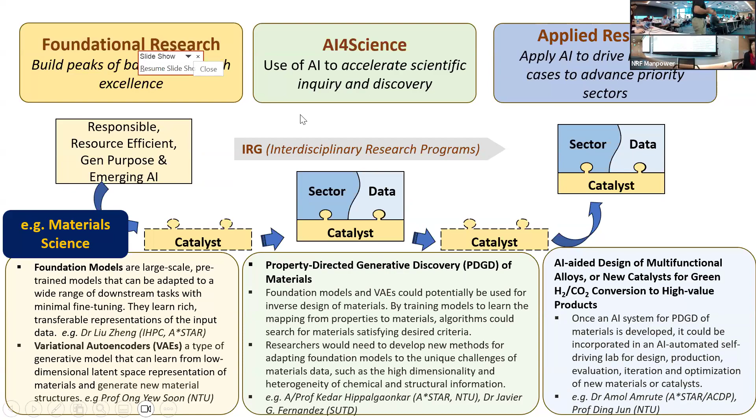Thank you, boss. Thanks, Kedar. It's really a pleasure to welcome all of you here. I'm Saif Khan, I'm at NUS Chemical Engineering, and I'm very happy to see so many friends over here.

We have an amazing program of talks. Let's go to the slide, and in the next 10 minutes I'll orient you, in addition to what Kedar has done, and talk about what we seek to achieve in today's workshop, and contextualize it in the framework of the other workshops happening. We'll discuss some motivations and drivers.

So first of all, who's here? We have an amazing collection of people - folks from academia, public bodies, and industry, represented by small and medium enterprises.

We have a collection of expertise in chemical and biological manufacturing that spans end to end - everything you may need, right from synthetic chemistry, biochemistry, biotechnology, through to reactor and process systems engineering, and all the flavors of AI, machine learning, data science, and optimization.

So we do have a competitive advantage in general - Kedar spoke about study trips abroad. In Singapore itself, in just a small land area, we have this amazing connectivity and concentration of basic science, translational research, industry and academic R&D, and policy making. Let's make use of that competitive advantage.

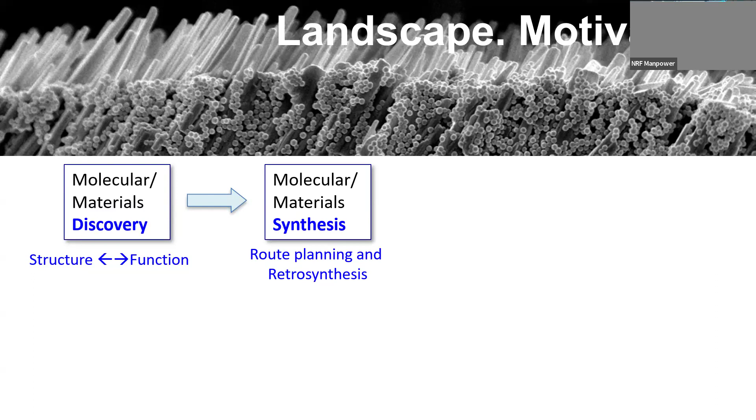This domain has been significantly accelerated by the availability of AI and ML methods. Currently, let's take organic chemical synthesis. Very large data sets already exist and are being mined in very different ways to discover patterns for reactivity, etc. There is a big development of high-throughput experimentation tools that generate the data that is needed to complement the AI methods that are being used.

This is not the focus of this workshop. In fact, next tab, because this is actually a workshop that will be complementary to the workshop we're having today. And this workshop, I encourage everybody here to attend, is the AI for Materials Science and Chemistry workshop on 8th May, which Kedar will be leading along with Beatrice and a few other folks. It's an amazing workshop that establishes the role of AI in the discovery and the synthesis side.

Now, for us in this workshop, next tab, please, we're talking about process technology. Once you have discovered new molecules, new materials, our job here is to understand what science we need to enable the scalable process technologies that will ultimately manufacture those new materials, new molecules, new therapies, etc. And often in manufacturing, we are performing multi-objective constrained optimization problems. Our process systems need to be scalable, sustainable, economical, robust.

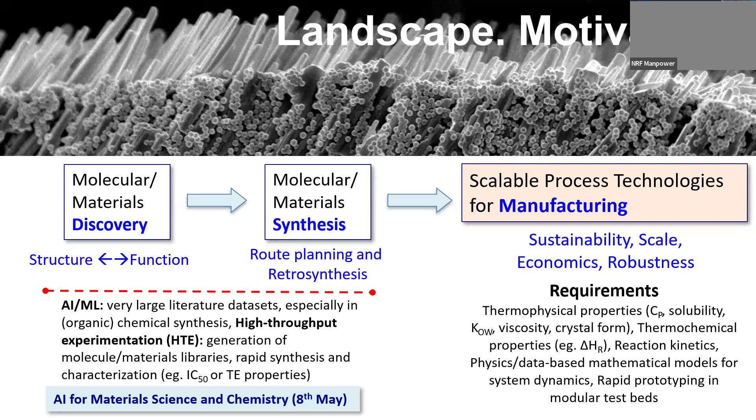And the kind of requirements that we face when we design processes for manufacturing are complementary. We need to know a lot more things: thermophysical properties, thermochemical properties, kinetics, transport properties, and so on, and string them together into process unit operations that ultimately do the jobs. You can do it in radically new ways, or you can use existing technologies. But this is the domain that we'll be playing with today. The questions we'll be addressing are the grand challenges in this particular domain of scalable process technologies. Next slide, please.

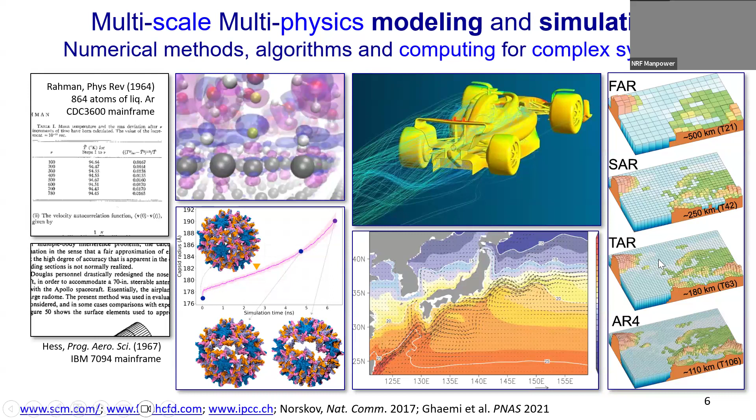We come to the AI revolution, right? And, let's say, no worries. And this is where we're playing today, right? The era of machine learning. Now, essentially, it builds on the era of computing, and the whole theme is accelerating discovery, scientific computation, and design. These are all things that we as manufacturing folk need to leverage, right?

So just a couple of examples of the things that AI is doing, and you'll hear a lot more from our speakers. But really what we've started doing is our ability to leverage AI with big data has revolutionized the way we, for example, infer dynamical laws from data. And we can actually infer or distill physical understanding from data. That's now a very big field in machine learning and AI.

We can use AI to dramatically boost computational simulation, such as computational fluid dynamics. And lastly, we have this amazing ability to now conduct generative design, which is bespoke design of process systems in ways that we could not imagine. So these are just some of the things that are coming together. Our ability to distill patterns and understand laws of dynamical systems, our ability to boost computation itself, leveraged by AI, and then also to be able to do generative design.

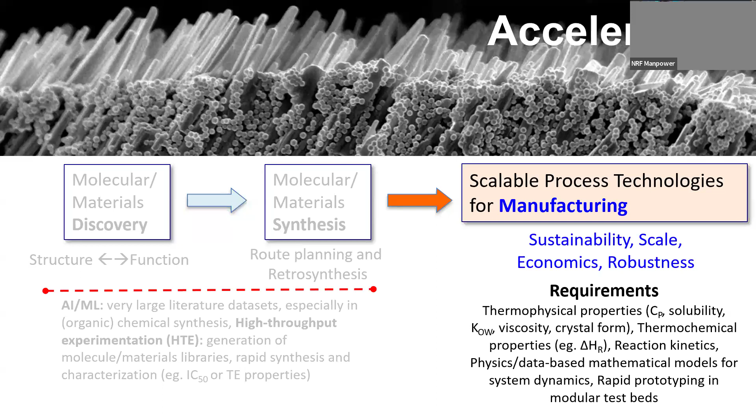Next slide. So that's the theme, right? At least one of the big themes is AI enables acceleration. And maybe we can explore today the acceleration in the context of scalable process technologies. What can we leverage AI to be able to do in fundamentally different ways for the manufacturing context? I have 3 examples. Next slide.

Some of this acceleration is things that we are actually doing today, really thinking about, at least at the lab scale or at the pilot scale, how do we accelerate process development? How do we generate a lot of data, use that data to conduct optimization, for example, finding optimal conditions for chemistry, but at the same time, with that data, learning or inferring knowledge from that data by way of reaction mechanisms, by way of reactive landscapes, etc.

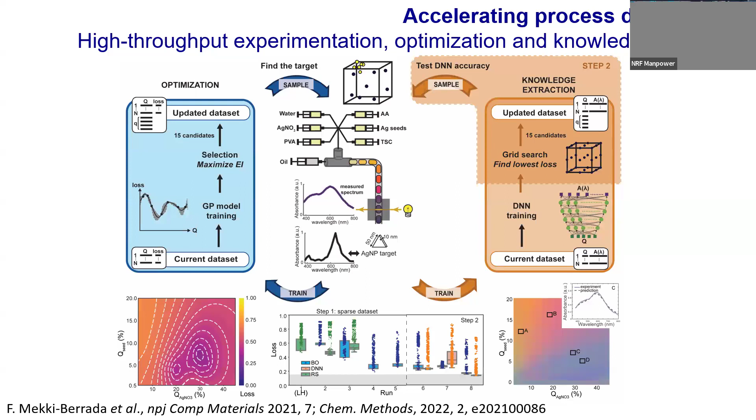Next slide. We're doing things like multi-objective optimization to be able to establish viable process routes towards new molecules or materials. This is ongoing efforts. Actually, these are some examples that Kedar, myself, and a bunch of other amazing interdisciplinary talented people are doing in Singapore today. Next slide, please.

And I think for us as a manufacturing audience, right, I think we can meditate on AI-enabled accelerated design of new process systems. So that's one thing, right? If we are going to discover new molecules and materials, can we really think about revolutionary ways in which we can use AI for science to accelerate the development of new process systems?

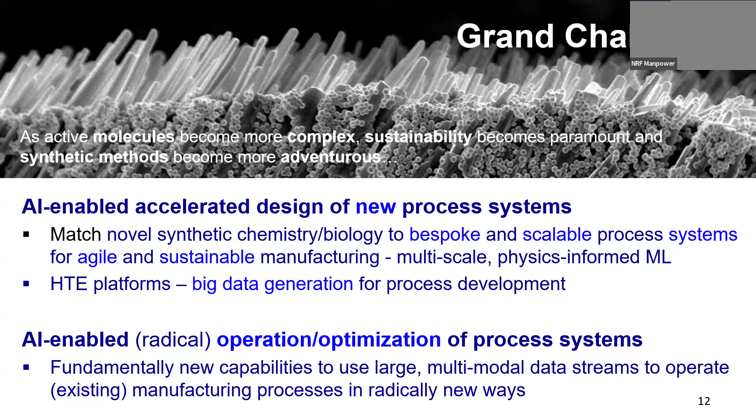We have fundamentally new capabilities to be able to use multimodal data streams to operate existing manufacturing processes in radically new ways. These are just some of my thoughts. You'll hear many thoughts from the roster of speakers that are coming. And we'll talk about the next slide, which is the brainstorming session after we've had our speakers talk.

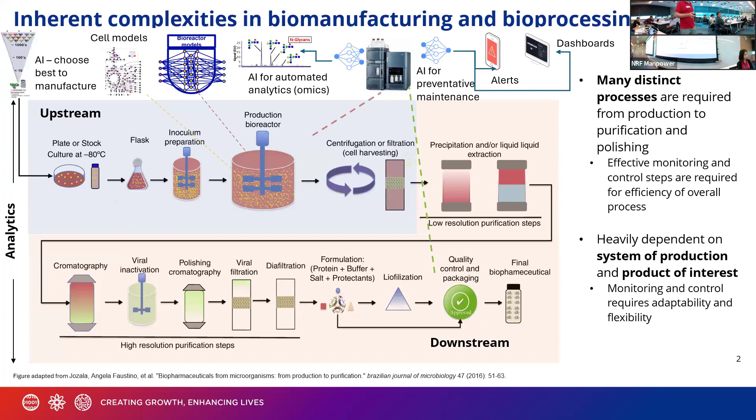Other models include bioreactor-based models, cell-based models. So for example, inside the bioreactor, we often have the cells that express the therapeutic. So how can we do metabolic modeling using these cell-based models? And even before we go into the manufacturing process, we can also use AI to choose what the best therapeutic is. So from a pool of candidates, choose the best one to bring to manufacturing. And each arrow that we see here, there's lots of data being churned out. And we have to capitalize on that data using AI.

In industry, they've already started to adopt AI. So these are two examples where GSK, Siemens, and Atos use a digital twin in their vaccine processes. And what they did is they hook the digital twin into the real world processes, and the sensors in the processes send information back to the digital twin, and then the digital twin simulates how to control for a healthy process. Another example is Sanofi and Dassault Systèmes also use a different type of digital twin where they can optimize the three-dimensional facility. So optimize the facility for efficient production.

Two years ago, we published a paper on how to harness machine learning to do better quality by design. We described that in a bioprocess, we can extract critical process parameters, like from the cell culture media—there's a lot of parameters in there, like amino acids, vitamins, metabolites. We can also use physicochemical parameters as input into a machine learning algorithm in an upstream bioprocess to predict critical quality attributes like cell growth, productivity, glycosylation level, and aggregation.

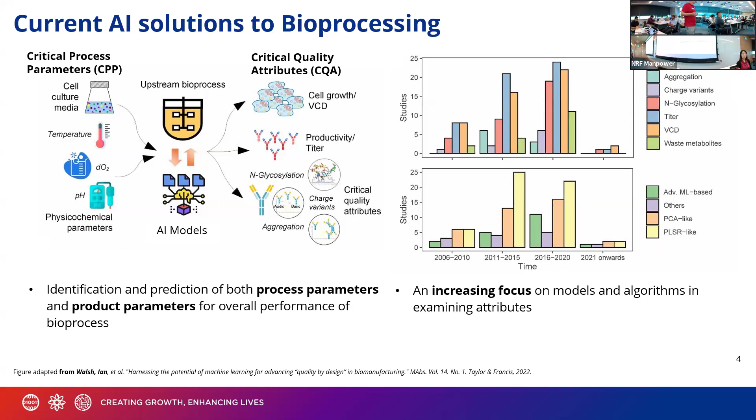So let me go through some examples of what we did over at BTI.

So let me go through some examples of software that we use to automate quality checks in the process.

This is an example of glycosylation on antibodies. This is very important for the function of antibodies because it's a regulatory requirement to screen for these glycans, since certain epitopes on the glycans can cause anaphylaxis in patients. Previously we've done this using a manual approach that can take days. If you have hundreds of samples, multiply that by days, and you get a very time-consuming, costly quality check. So we took the data and transformed it. Compared to the conventional approach, where it's very difficult to characterize isomeric glycans, we transformed the data using an extra layer of ion mobility, and using that transformation we were able to separate the isomers and do pattern matching, where we could determine glycosylation in seconds or hours compared to days.

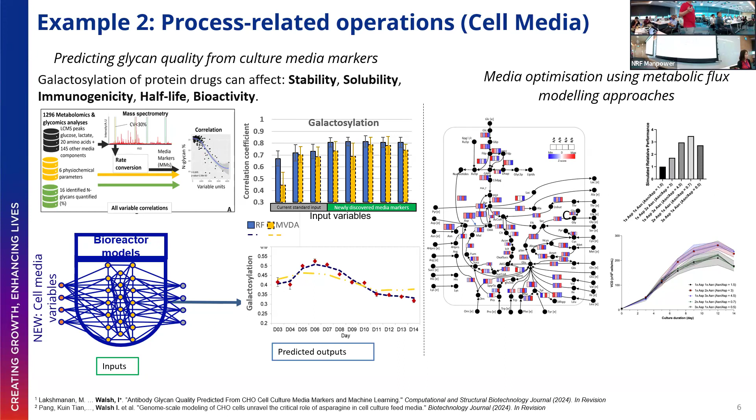So how can we use these machine learning and mechanistic models in an actual media development process?

Well, first, it's probably best to describe the traditional design of experiments approach, where a series of bioreactors are used, each having a predefined media. We also characterize the output variable, the product yield. In the DOE, we can find the best set of media variables that correspond to the best product yield. Then we have to take samples from the bioreactors and show that the quality attributes are within a desirable range. If they're not, we have to repeat a cycle of DOE, and this can go up to 3 rounds and take almost 5 months, which is very costly.

So what we propose is to replace the DOE with our machine learning and mechanistic model, simply taking input from the mass spectrometer, such as basic metabolites, amino acids, and vitamins.

Changes in those can be placed as input into the algorithms, which completely removes the need for a cycle of costly experiments, and we can do in silico experiments instead. So we can use the algorithms to run hundreds of thousands of dry lab experiments that correspond to the best simulated CQAs, which correspond to the recommended media formulation. We bring that to a bigger scale bioreactor, and then see if, in our offline measurements, the CQAs are within the desired range, and then continue to scale further. So this part greatly speeds up the process of media optimization.

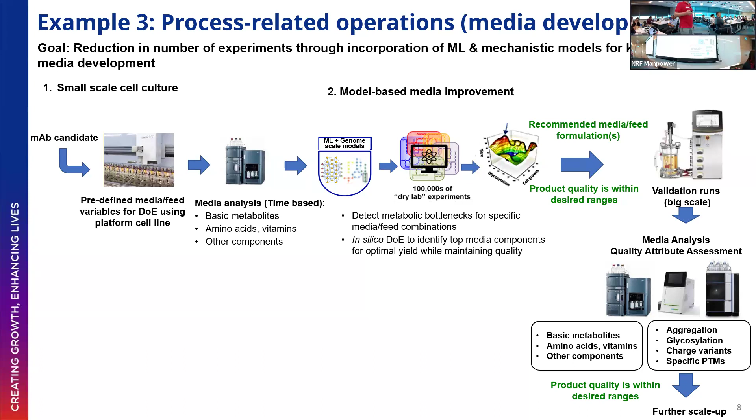So what are the open challenges in AI biomanufacturing? Well, first of all, we believe there's a lack of large, high-quality data sets out there. All the multinational companies do have these high-quality large data sets, but they keep them private. So perhaps in Singapore, what we can do is have the IHLs and RIs come together to create a large, high-quality biomanufacturing data set that non-commercial and academic researchers can use.

The second challenge is the integration of these data types. At BTI, for example, we do have good integration of proteomics, transcriptomics, glycomics, and metabolomics for biologics. But there's much more work to be done in new modality areas like cell-based therapies and mRNA. So that's an open problem, to develop these integrated omics data sets.

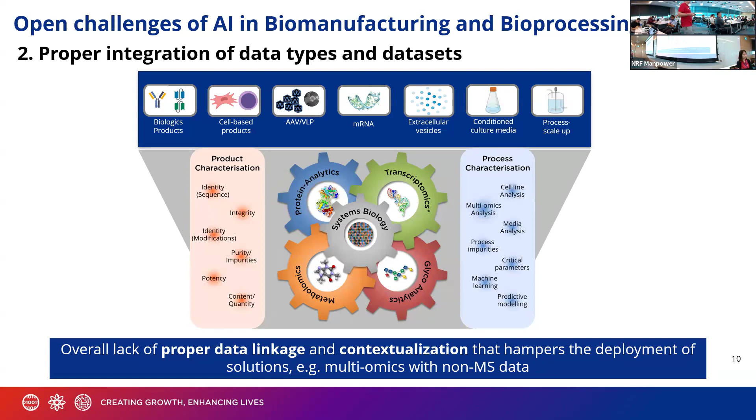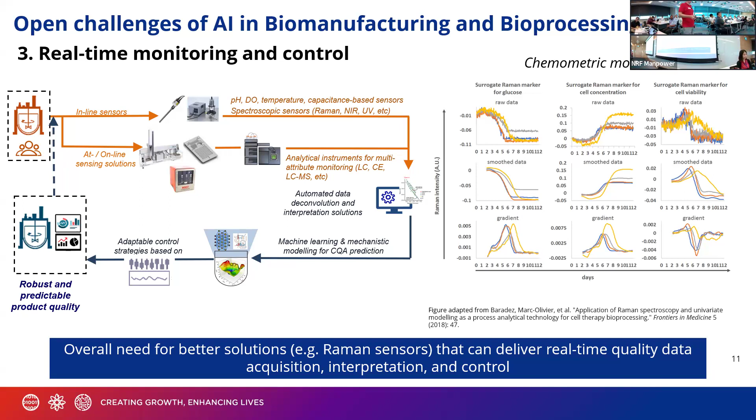And the holy grail of biomanufacturing is to develop a real-time monitoring and control loop, where from the bioreactor we extract various data from inline, at-line sensors, spectroscopy sensors like Raman, your usual mass spectrometry data. We use all this data, pre-process it, place it into a hybrid model which has mechanistic and machine learning components, and use it to output how to control the bioreactor for robust and predictable product quality.

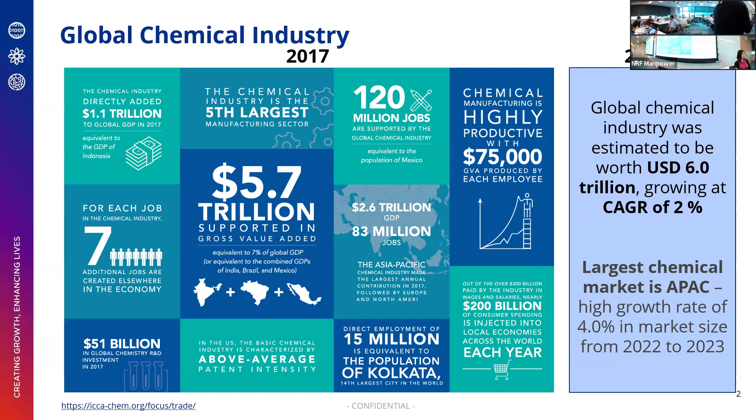I think unlike biologics, which is really more complex, on the chemical side of the house we've been doing this for many years, and the world and the chemical industry live in the benefits of the advancements in the chemical industry over the last century. This is really the landscape of the global chemical industry in 2017, and actually in 2023, not much different. It's still a very important segment of global GDP, and of course the APAC region is growing as well. So what is the motivation behind what you call transformation in the E&C sector? I classify it into three key trends in the chemical industry that are really happening and urging this transformation.

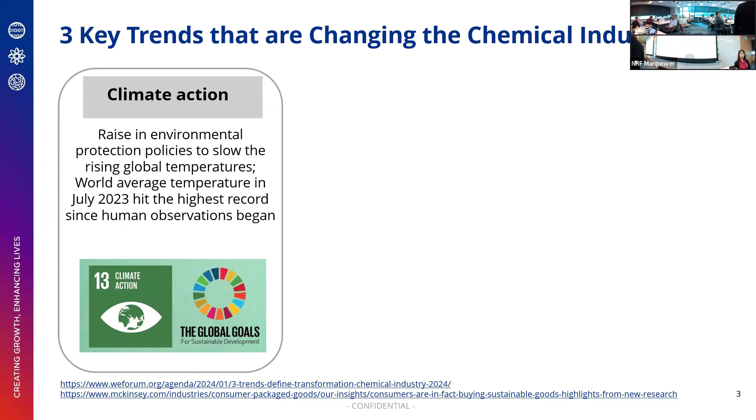One is of course the climate crisis, under the rising notion that a lot of our actions are actually causing climate change. There's also a lot of things worrying in the chemical industries and companies, and that's really the geopolitical shift and decarbonization imperatives around. These dual forces at play are causing changes and responses from customers. The last shift is also all of us demanding more and more sustainable products that you want to use, to play your part to save the environment for our next future generations. So all these are, I think, the fundamental forces at play for why there's a need to further look into chemical industry and its transformation.

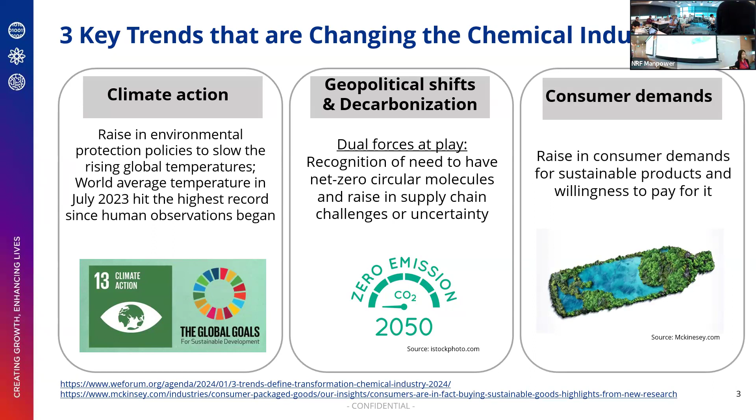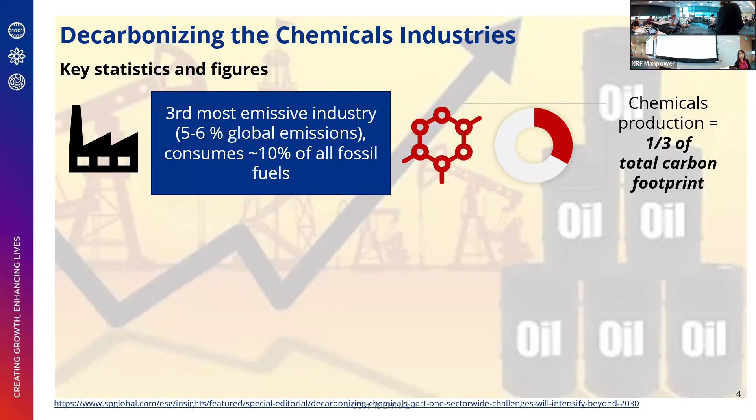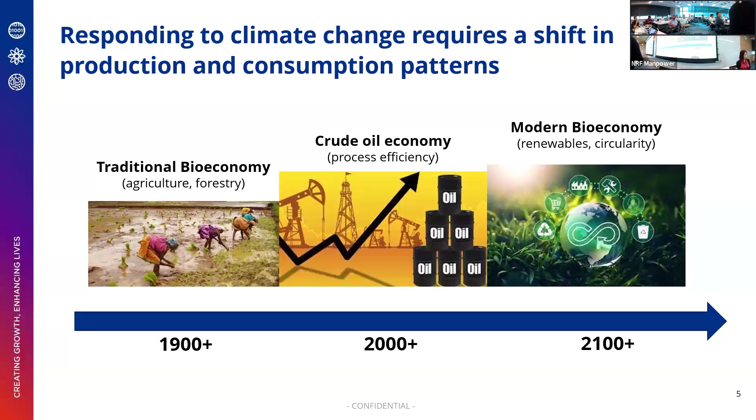So where we are today, of course, is we are beneficiaries of the crude oil economy, and in the future, perhaps it's a combination of new industries embracing something like what's called the modern bioeconomy. So in our lab in ISCE2, we look into the nexus of chemistry and biotechnology innovations, and synergize it with much modern digital tools, really to target some of the chemical problems that we face today in the E&C sectors, in the area of chemicals and fuels.

So we leverage not just our chemistry knowledge, but also our A*STAR chain connections, for example, and really look into tools, automation, and putting together this multidisciplinary team, not just within ISCE2, but also leveraging a lot of expertise across different parts, different institutes of A*STAR, the IHPC, BII, IMCB, CFP, etc.

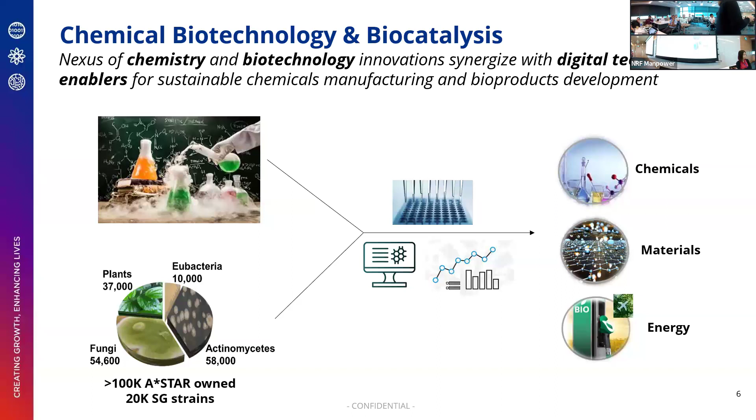Going forward, in the area of synthetic biology and chemical biotechnology, maybe I'll just give a definition. What are really the differences and also the relation to chemicals? Synthetic biology is definitely a much broader definition. It's a multidisciplinary field that in essence involves engineering of organisms for a particular function, ideally a new function, a function of choice. And with that, the organisms can really include biological parts, enzymes, systems, devices. So it's multi-level—it's almost like the biologics case where you take a cell, you engineer it, you put in engineering principles, and create a new function.

It's a very broad range and very preliminary. It has been shown to have impact in multiple industries, beyond chemical industries, of course. But in chemical biotechnology, I think what we really want to focus on is really the application of synthetic biology for chemical synthesis only. It's also the engineering of enzymes and cells and microbes, but really for chemical industries.

So with this, I want to highlight a recent quote by a co-founder of DeepMind, that AI is probably helping this area to come of age. The quote basically says that the world will soon see a new wave defined by two key technologies: what we believe is AI, and also the advancement in the ability to control organisms and really impart new abilities and new functions.

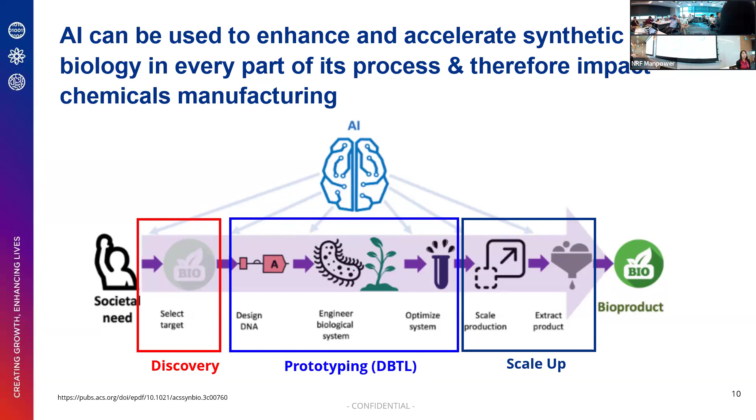So in the next few slides, I'm just going to give a few examples of how people have been trying to advance this area, both locally and internationally. A lot of folks in the world have been looking into how we can develop models to accelerate prototyping - how can I make it faster? How can I do things that make it faster to really get to the process that I want, to get to the system that I want?

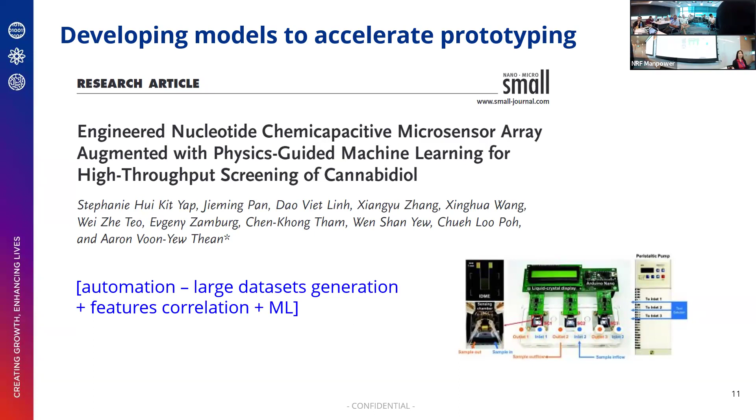So this is a local example from NUS. It's really about making use of automation, generating large data sets, creating feature correlations, and machine learning approaches. So this is one type of approach.

In the biocatalyst development phase, this is an example from Professor Arnold's lab. It's also about automation generating curated huge data sets, and then applying a multimodal type of approach to really understand this and ask ourselves, how can we do this better in the future?

Our contribution in this space is in the enzyme engineering space as well. I'll just use one slide to summarize what we have been doing. We have been building a high throughput experimentation platform, leveraging our expertise across different groups in A*STAR as well as other collaborators to look into not just computational modeling, but combinatorial approaches, multimodal predictive work - which we are in the midst of trying to publish - and also applying generative AI in the development of some enzymes recently.

So that's a lot of work that's ongoing, merging the idea of high throughput curated data generation with models to accelerate some of the developments. This is just one example of how we took the enzyme, took the information we have from the natural product library through a mining process, applying automation to generate large data sets, and then AI models to discover and engineer new plastics.

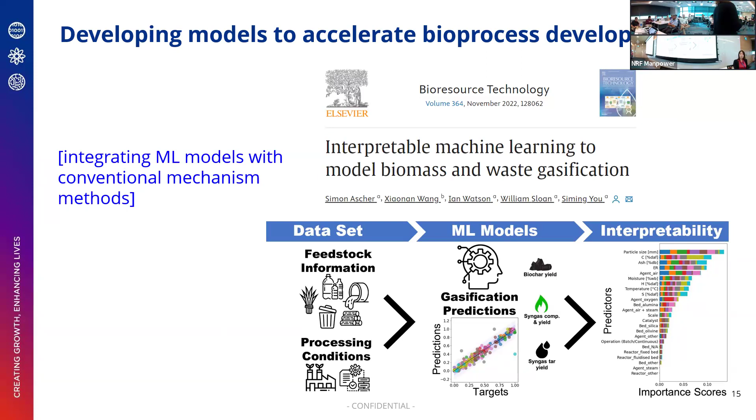People talk about the need to develop integrated models. In terms of discrete models, I think more has been done - if you take one type of information, one type of model, one type of parameter, it's a lot easier, and some of that has been seen in the literature. It's a lot harder when you need to integrate everything. That is kind of different and quite hard to understand, as one system may not talk to the other as well.

This is really an example of how you can integrate the advancements of biocatalysis to make precise chemistry of choice, harnessing insights that nature does very well, and then couple it with key advances and critical chemistry that has been developed by chemists over the decade. Today I think in biology is actually irreplaceable as well. There are aspects where biology and chemistry can complement.

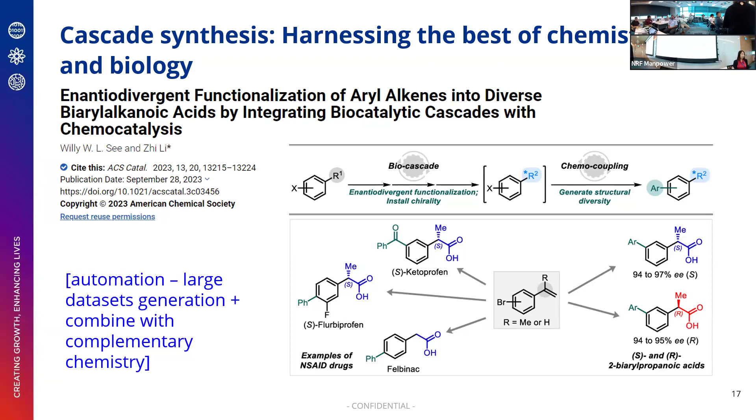This is also a highlight of an example. In this case, how do you find the best way forward? Which is the best way forward? Finding the best path forward, I think this is an example of recent work at MIT, and it's really to merge enzymatic and synthetic chemistry with computational planning.

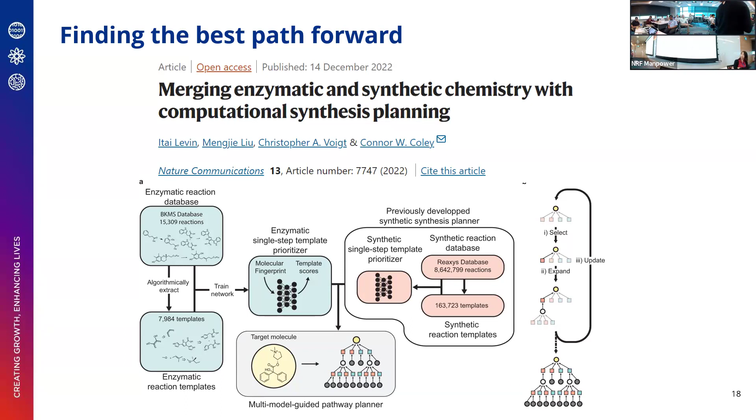But is there a particular point when you say actually you should just do this with a chemical approach, or you should just do that with an enzymatic approach? I think we are still trying to find the best path forward. So our contribution in this area is for you to actually find the best path forward. One of the best ways is actually to generate a lot of data.

So I just wanted to end off by saying that it's definitely possible to use AI to enhance every step of the way, all the way to help manufacturing and finding the best processes, finding the best route forward. For the advancement definitely needed, I think we need to integrate across the developmental chain. I think that's hard, that's really the challenge going forward. I think AI can play a big role here, and that's really a big potential going forward. Thank you.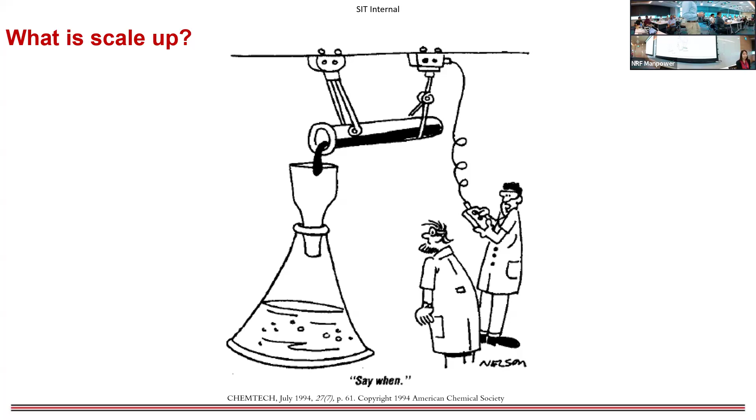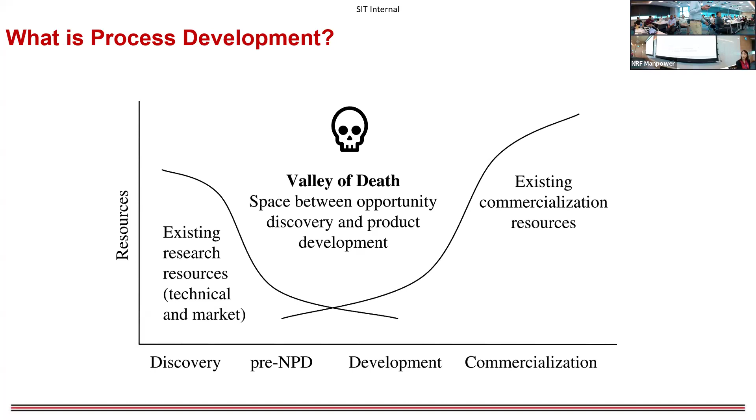So what is process development? From an innovation point of view, it's the phase in between the discovery and the commercialization route. It's where you test your hypothesis at a large enough scale, and when most of your ideas die. That's why it's also called the valley of death. It's a tough place to be playing, I have to say, but it can also be exciting.

From a technical point of view, if we look at complex molecules, the making of pharmaceuticals, for instance, we can loosely think about the R&D as three distinct phases: the discovery phase, the manufacturing phase, and the process development, which is typically looking at making kilograms, a couple of kilograms of products at the pilot scale to develop a proof of concept.

And what goes in people's heads at that phase? Well, you take something from the discovery, you look at, can I use it as it is? Most likely not. Then you need to screen for alternatives. You need to see whether there are examples of being demonstrated at a sensible scale. You can see whether the experiments are reproducible to a level you're comfortable with, whether there is existing know-how in-house to actually translate and move it forwards.

We need to consider safety. Safety is paramount, okay? And we need to have a business case. No money, no talk, okay? And this is under a lot of pressure. In this space, especially making specialty chemicals or pharmaceuticals, every day that you can save, the day that you can monetize on your technology, that you can extend your patent, there's a lot of money at stake.

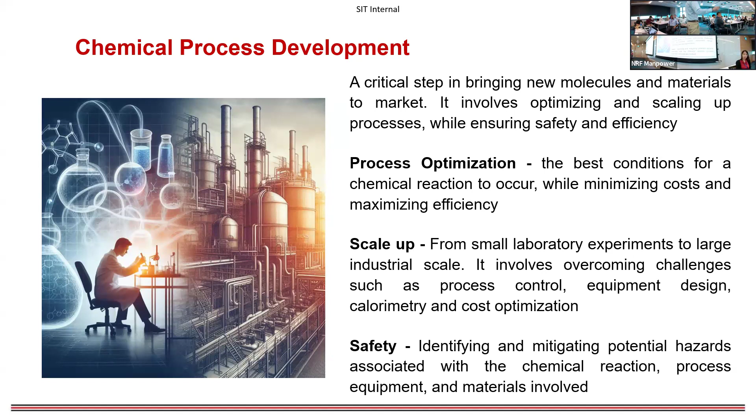All right. So, if I were to summarize a few points, chemical process development looks at bringing new molecules to market in a systematic way, and it looks at process optimization, best conditions for chemical reactions, maximizing efficiency, costs. We also look at ways to bring things from round bottom flask to pilot scale to industrial scale, looking at process control, equipment design, calorimetry. There are a lot of parameters involved. And of course, safety, identifying and mitigating potential hazards that are associated with charging, discharging, combining, storing chemicals, and so on.

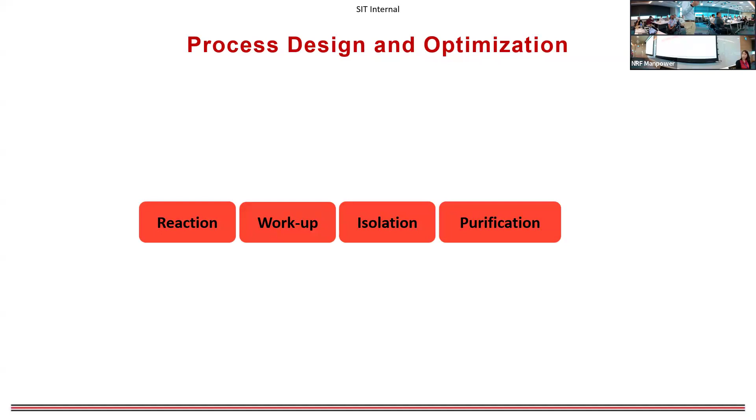So we usually focus on 4 things as scientists: reaction, workup, isolation, purification. But the process is really more than that. We have a lot of things that need to be considered, and these all contribute to our final decision on what process we should have and should consider.

We also need to be aware that we need to make a lot of steps on the journey going from lab to commercial scale. And at each stage gate, right? Can you imagine this in the process development process? We need to make a decision to go to the next step, go or no go, based on the available information that we have at that point in time. So we can see that at the beginning we have very limited information, and we need to have a judgment call to move to the next step.

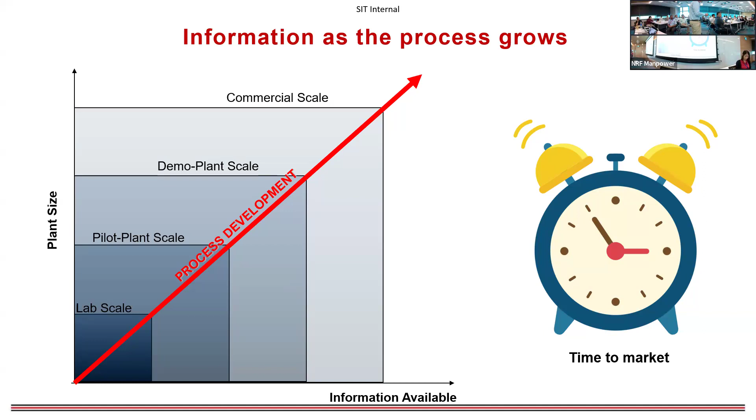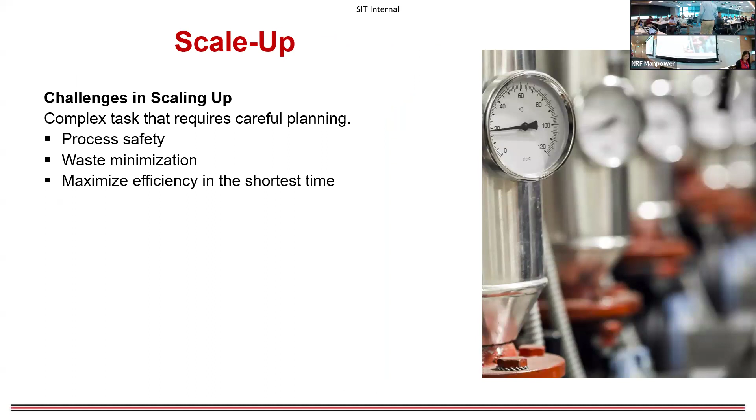At pilot scale, we have a bit more information, but again, we don't have a clear picture. You see where I'm going, right? You need to be quick getting to market. You don't have a full picture. You need to commit to some decision and move on. And that's why it's critical for us to understand things. Yes, we want to maximize cost efficiency, designing sustainable processes, but we need to make sure that stuff is going to be safe when we do it at sensible scale.

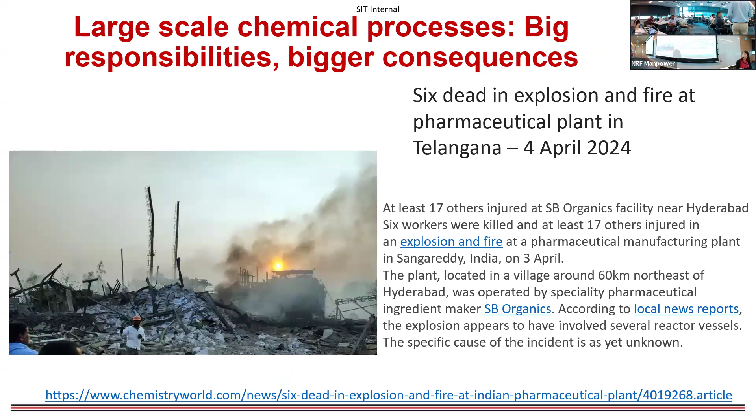Okay, so let's get on a positive note, and let's talk about some of the challenges and opportunities in this space leveraging AI. I just selected a few in the interest of time, looking at ways to make sustainable chemical processes, looking at the complex reaction outcome, filling the data and information gap, because we need to make decisions. And ideally, this is more aspirational, we do scale up in minutes rather than months.

So in terms of making processes more sustainable, there are a lot of components that we can look at. We can look at minimizing waste, looking at possible reactions that can trigger accidents, that can lead to toxicity, failure to comply with authorities, and so on. Efficient use of resources. And because sustainability is a key driver nowadays for a lot of companies in this space, how do we use life cycle thinking in a way that's easy to use, that is quick to use, and maybe helps to get better decisions in terms of supply chain?

If we look at the pharmaceutical industry, the majority of the emissions are actually scope 3, which are outside the factory floor. They're based on decisions that you make based on your suppliers. Of course, technically, we can look at optimizing reaction conditions, developing high throughput processes, leveraging process intensification, adopting novel technology to open up new reaction space, and ideally trying to go for low energy use technologies.

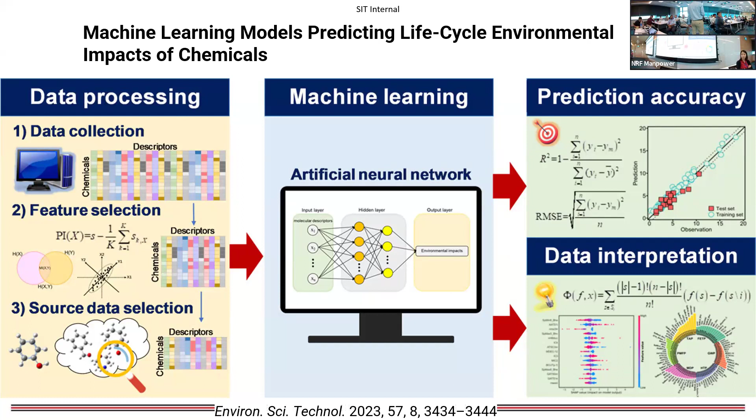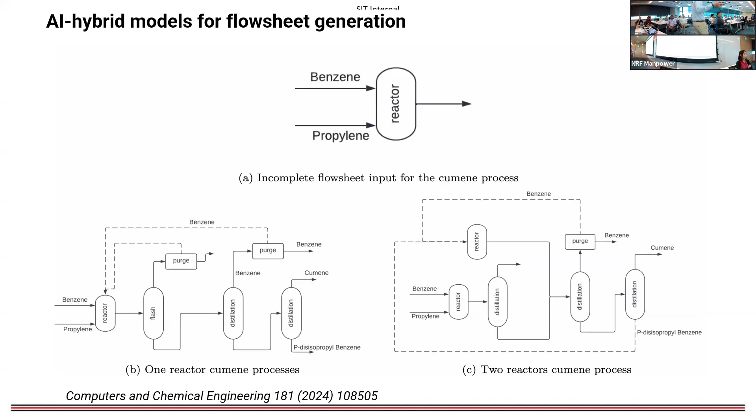Or, for instance, you want to develop a new chemical process, you only have limited information, and you can use artificial intelligence hybrid models to generate flow sheets, so you can get a first feel on how the process should look. Sure, you should always show this to your friends in the engineering department, who might say this is not actually very good, or maybe it's missing a pump here and there. But you get the idea. You can input text or simpler information closer to the domain of chemists, biologists, and so on, and get a first cut of what the process might look like.

And some that are even bolder are trying to combine the two concepts, where you can put molecular structure and stoichiometry, generate the flow sheets for the process, and then using a different type of neural network, get the environmental impacts as well. So there's a lot of excitement in the various aspects of chemical process development, whether environmental, technical, engineering, and so on.

So where could AI help us in areas that are maybe underserved at the moment? It's a long list, and it's not by any means exhaustive. There are things we mentioned this morning about physicochemical property predictions. Yes, there are certain tools. They are scattered, usually behind a paywall, and usually require quite a lot of data behind them to work. We want to do that with smaller data sets: just a few experiments and then get what you want. Accurate calorimetric estimates from a molecular description or even a lab recipe would be fantastic. No need to spend $500,000 on a reaction calorimeter, though you'd probably still run the experiments anyway. Also heat transfer, mass transfer data, equipment characterization.

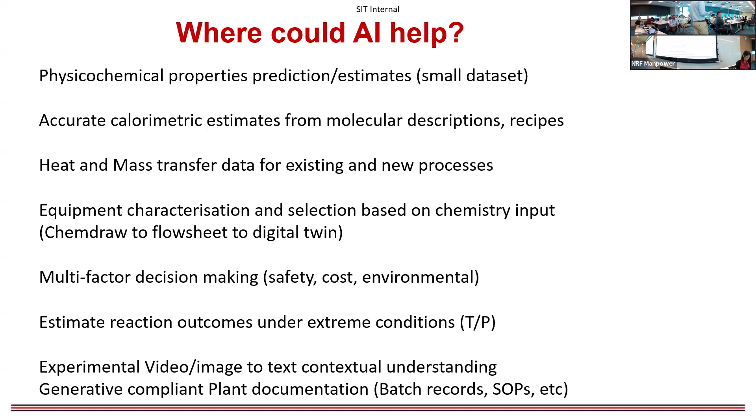Estimate the reaction outcome under extreme conditions. This is not trivial. You need to perform selected experiments to get enough information, and we'd do it without performing the experiments. Or using video or image to text for contextual understanding: take a picture of your running process, and the AI tells you what's going on. Generative compliant plant documentation. This is very tedious, but it's a necessary evil. In principle, we have the technology, so why don't we use it? Why don't we see it? Maybe not yet. So we need to be aware of the gap.

There are certain things that we are lacking. We don't have very good multiphasic data from experiments. We might have some scattered information, and very often we make a lot of assumptions, but getting actual good quality data from multiphasic experiments is difficult. Also, having high throughput experimentation infrastructure that does not just screen different compounds, which is useful for certain applications, but gets data that is important for scale dependency. So I run experiments at small scale, high throughput, and I record exactly the information that I need for the scale up.

Again, this is probably repeating what others say, but it means that is a common concern about getting accessible open source, ideally database platform with the relevant high quality information. At the moment, this is not so easily available.

Of course, it has to be important that we get a good interdisciplinary collaboration between key domains. Getting people that are experts in AI, and I mean experts that do that all day long, and get people that are highly focused in chemistry or chemical engineering or biologics and so on, and really trying to combine their expertise in ways like, look, this is my domain. I don't understand yours, but you do. Can we come up with something interesting?

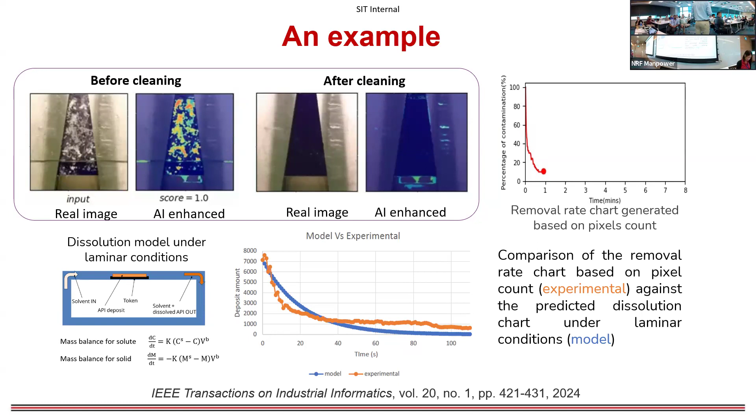I have to say, that was the first time trying this, right? It didn't do a bad job, okay? So this is just one example. There are many more out there. But it's just to stimulate perhaps the conversation later on.

Because I have a dream, okay? That I can actually take pictures using an app on my phone, like what we can do now with Copilot, with ChatGPT, Claude, you name it, right? And get all the relevant information that allows me to then convert quickly, in minutes, into a scalable process.

So I will conclude with this. I hope that we will have fruitful discussion in a moment. We have a lot of firepower in the local ecosystem, and we should be aware of that, right? So I hope that we can actually find ways to make a difference in this space. Thank you.

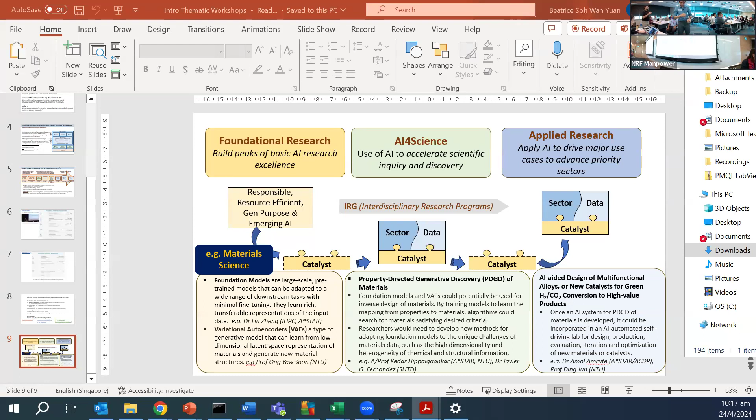Thank you, Valerio. So we've seen three talks, right, from the practitioners in biologics, in the intersection between chemistry and biology, as well as in chemistry. Now let's flip. The next three talks will be about the data side of things, the computation side of things, the AI side of things, right? Where we have people who deploy some of these state-of-the-art methods towards the chemical, materials, and manufacturing sciences.

So first, it's a pleasure to welcome Professor Wu from NUS, and he'll be talking about machine learning for process modeling, control, and diagnosis. So we'll flip the flavor of the session now more towards modeling, optimization, etc. So Zhe, the time is yours.

Yes. Thank you, Saif. So today I'd like to share some of our research and thoughts on the open issues for machine learning in process modeling, control, and diagnosis. So first of all, I'd like to briefly introduce my research interests. I focus on four things here. The first is AI in process modeling, optimization, and control. The second is AI in chemical process diagnosis and cybersecurity.

And the third is AI in broad areas of chemical engineering, including using AI techniques to accelerate material discovery in collaboration with our colleagues. And the last is computational modeling, like CFD simulation and Aspen simulation for the purpose of TEA and LCA analysis. So today I will mainly focus on the first two because they are highly relevant to our process model.

So first of all, I'd like to introduce what process systems engineering is. Process systems engineering is an interdisciplinary area which integrates modeling, data analytics, design, optimization, and control techniques to build a model for process operation. So basically, in my research, I focus on the framework of AI in chemical process control and optimization, including the theory, the methods, and also the practical challenges. We will discuss some details in the following slides.

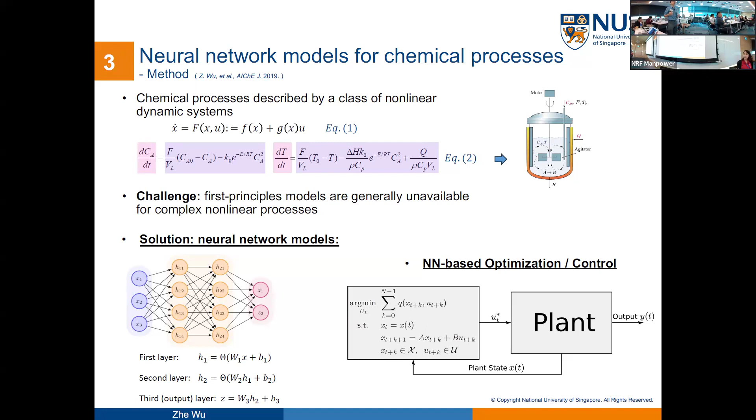So this is just a simple application of neural nets in process modeling. Next, we apply this simple neural net approach to many different processes, including chemical, pharmaceutical, and energy systems, and demonstrate their effectiveness. So in conclusion, we know this conventional neural network has its advantage if we have a large data set.

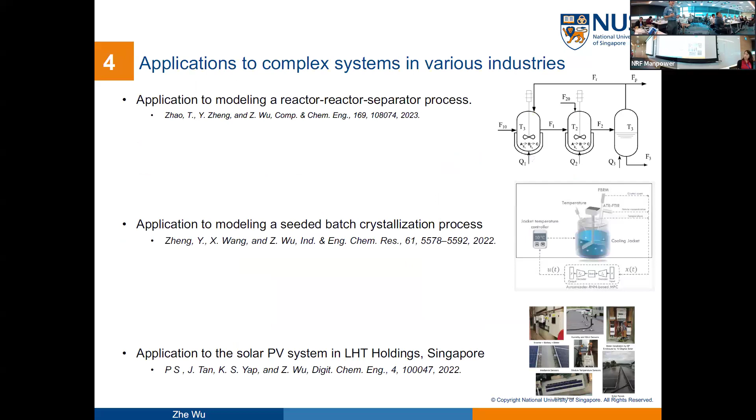But the question is, usually the machine learning model does not extrapolate well and requires a big data set, and such a big data set may not be available in practice. So how do we tackle this challenge? One of the possible solutions here is to integrate data with domain knowledge, because as chemical engineers, we always know some type of a priori process knowledge or domain knowledge.

A very typical way to do physics-informed machine learning is to incorporate the first principle model, or sometimes it's called governing equations, into the training of machine learning. For example, here we can introduce another physics-informed loss term, which is basically the left-hand side of your ordinary differential equations minus the right-hand side of the ordinary differential equations. By introducing this physics-informed loss, we can significantly reduce the amount of data needed for training such a neural network.

We also apply this physics-informed machine learning to the previously introduced CSTR example, and we demonstrate that by introducing this physics-informed loss term, we improve its generalization performance beyond the training data set, and also significantly reduce the training sample size needed.

However, there are some open questions in the physics-informed machine learning area. For example, are there any other types of domain knowledge that we can introduce? Currently, most of the physics-informed machine learning work you can find online introduces first principle models into the training process. However, we know there are, of course, many other types of domain knowledge, so there should be some other ways to introduce different types of domain knowledge into the machine learning model process.

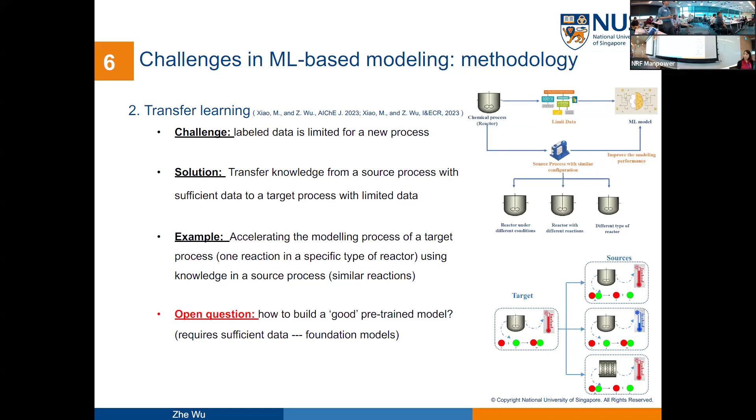And the third challenge I'd like to highlight here for the methodology part is safety in machine learning. We know for the chemical industry, safety is always one of the most important topics. So basically, we want to ensure safety of the machine learning model at each stage of its life cycle, including learning, modeling, and implementation.

Here I again use a simple example. We know reinforcement learning is about learning an optimal decision by interacting with the environment. However, for the chemical industry, it's always very difficult to apply reinforcement learning, because we cannot allow a computer to try some dangerous temperature or pressure in order to learn the best decision-making process.

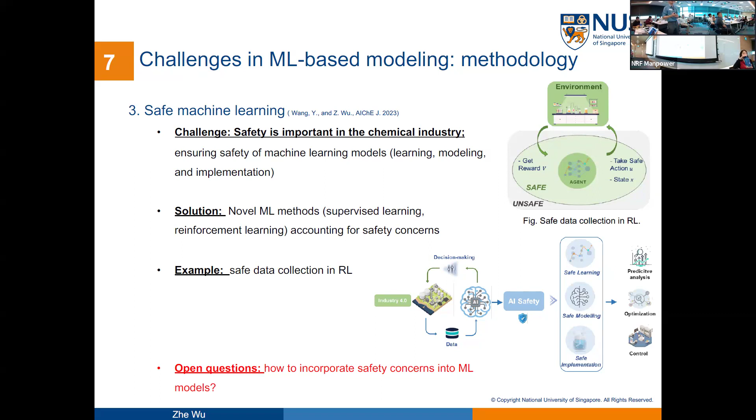Therefore, if we can introduce some safeguard mechanism that can ensure the learning process is kept within a safe operating region within reinforcement learning, then we basically guarantee the safety of our machine learning models, at least in the learning stage. So the remaining question is, how can we incorporate safety concerns into the other stages of machine learning, like modeling and implementation?

All right, so next I'd like to discuss two points in the challenges for machine learning based modeling. This is more about the theoretical side. We know for machine learning models, regardless of physics-informed machine learning or traditional black box neural networks...

The training process is like we have a training dataset, and then we build a model on this training dataset. We can see the training error or the validation error at the end. However, a more important question is, we do not know how this model will perform on some new, unseen test. Which means if we apply this neural network model to a real world system, we do not know how this model will perform.

So this is actually the so-called generalization error in the neural network. For this generalization performance, we derive a mathematical upper bound for the generalization error that can characterize the upper bound depending on the training error and the model complexity. So it theoretically guides us on how to construct a neural network such that you can keep your testing error, or the generalization error, as small as possible.

And the second part is machine learning modeling of hybrid dynamic systems. For all the previous examples we discussed, like modeling of CSTR, we know it's a continuous process. Machine learning models can do very well for modeling either continuous or discrete time systems. However, it's hard for machine learning to capture both continuous and discrete dynamics at the same time. So in this work, we built a machine learning model for hybrid dynamic systems that can capture both behaviors.

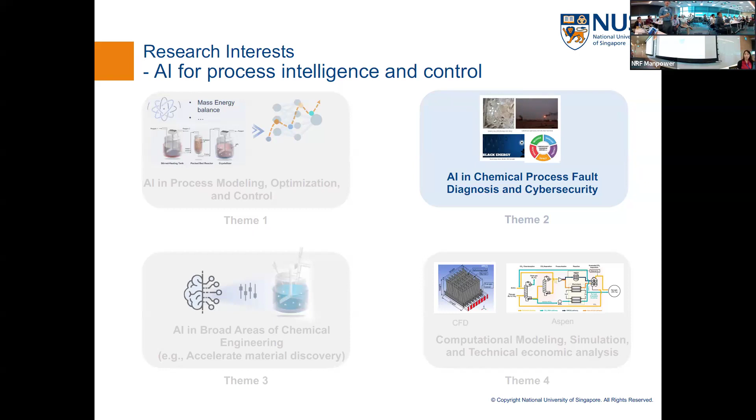So this is theme one, where we developed some recent works for AI in process modeling, optimization, and control. For the second theme, I like to point out the use of AI in process fault diagnosis and cybersecurity. The first part, process modeling, is essentially a regression problem. The second part is essentially application of AI for classification problems. We know traditional process fault diagnosis basically tries to identify process faults in daily process operation.

Nowadays, cybersecurity is another important issue in chemical industries. So here I list the difference between process faults and cyber attacks. Basically their impact tends to be similar because they both disrupt normal operation. However, cyber attacks are designed in a different way because they intentionally disrupt your normal operation as fast as possible, unlike process faults.

Again, machine learning and AI can be used to improve cybersecurity. Basically we have two ways to detect cyber attacks: one is model-based method, and the other is data-based method. For the model-based method, it's similar to the digital twin process model. The first step is to have a good model, and then we can rely on this model to do prediction. If we see major deviation between the prediction and the real sensor measurement, that's a signal there is a cyber attack in the system.

The other way is the data-based method. Here we don't have a process model; instead, we just directly use the real-time sensor data to detect whether there's an attack or not. The open question for the data-based method is how to build a good representative data set under different scenarios, like attack or no attack. Because this is essentially a classification problem where we try to identify two classes, either under attack or under no attack. So the data set is the key component for cybersecurity.

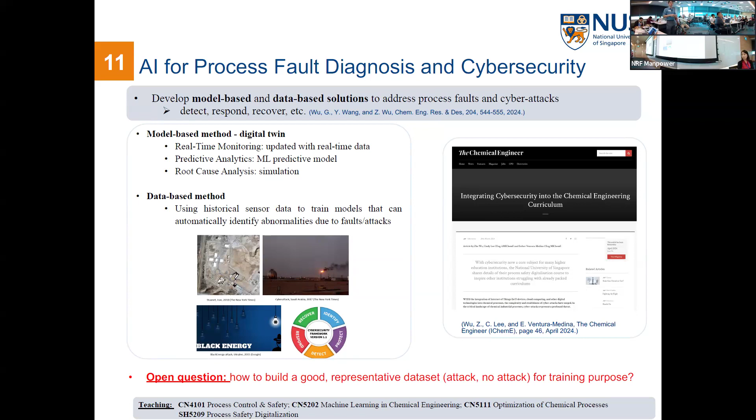Lastly, I'd like to emphasize that in addition to research, we are also actively bringing AI into the undergrad and grad courses in our department. We opened a new course, machine learning in chemical engineering, and optimization of chemical processes. In the future, we will also introduce AI in robotics in our department. So with that, I'd like to thank you for your attention, and I'm happy to discuss any other questions later.

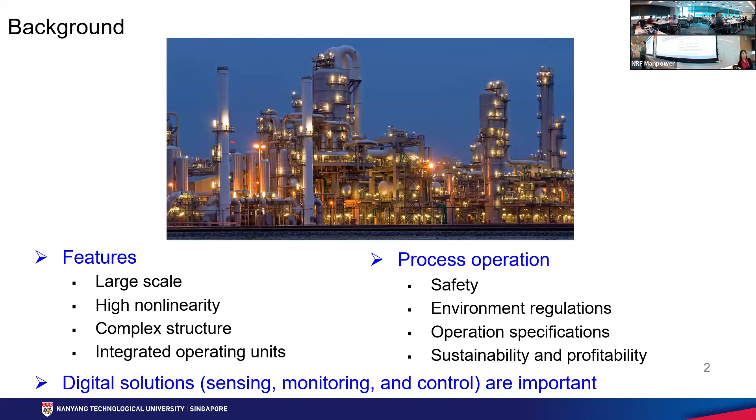At the same time, there is a strict requirement on the performance of manufacturing activities. First of all, we need to ensure production and operational safety. We need to meet even more strict environmental regulations and satisfy operational specifications so that the production performance is consistent and product quality meets the level or expectation of the customers. More importantly, we need to ensure the operation is sustainable, and after all, the company can make money from the manufacturing activity, which is not easy.

Companies have witnessed this critical problem, and they are embracing digitalization, or digital transformation. Digital transformation is playing, and will be playing, a more important role in revolutionizing the operation of process operations in the chemical industry and beyond. For us, process systems engineers, it will bring about several benefits.

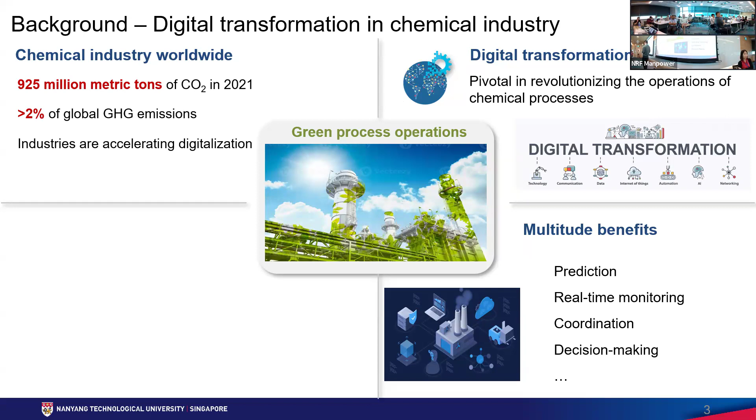First of all, it can help us characterize the dynamic behavior, or prediction. We can use digital tools to perform comprehensive, accurate, precise, real-time monitoring of what is happening in the process. In addition, with the sensing information, we are able to make more informed decisions in terms of how we coordinate manufacturing activities and how we manage real-time production, including coordination and distribution.

We envision that ultimately we would like to develop high fidelity, robust machine learning digital twins. Such digital twins will serve as the key for smart manufacturing and, of course, including process design, smart monitoring, sensing, and automation, in order to ultimately achieve sustainability in multiple dimensions in chemical manufacturing fields.

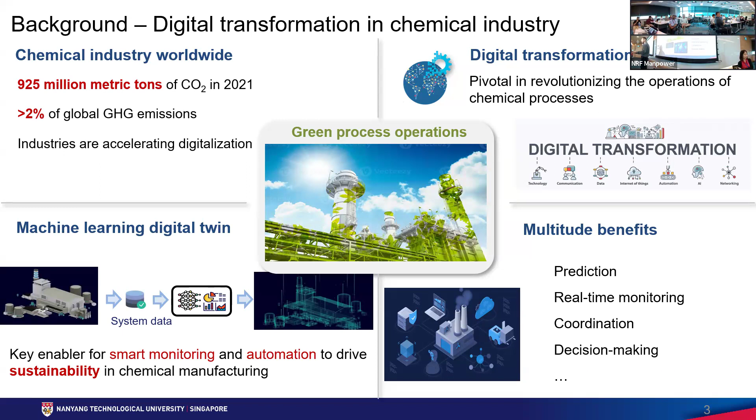As for us, our group, as well as Professor Wu at NUS, we identify ourselves as process systems engineers. We address problems including process sensing, fault detection, control, real-time optimization, and we also conduct some process designs so that they are compatible with our process control solutions.

So here is a very brief overview about what process control means. Basically, we have the process. Considering the process is already there, we look at the small time scale of the system operation.

We consider the dynamic behavior of the process, and we use the process control system to regulate in real time how the system should behave. For example, we intervene the process operation, we change the flow rate, we change the heating input, we adjust the pressure so that we force the system operation towards a level which is more desirable, and we ensure the safety of the process operation. But the controller itself, or advanced process control itself, is not sufficient.

Because remember that when we make informed decisions, we need good algorithms, but at the same time we also need comprehensive information about what is happening in the process. By addressing this, we could use a process sensing scheme, which we call state estimator or state inference. It takes advantage of the limited hardware sensor information, and we use our developed algorithms to infer, to estimate, or to predict what is happening.

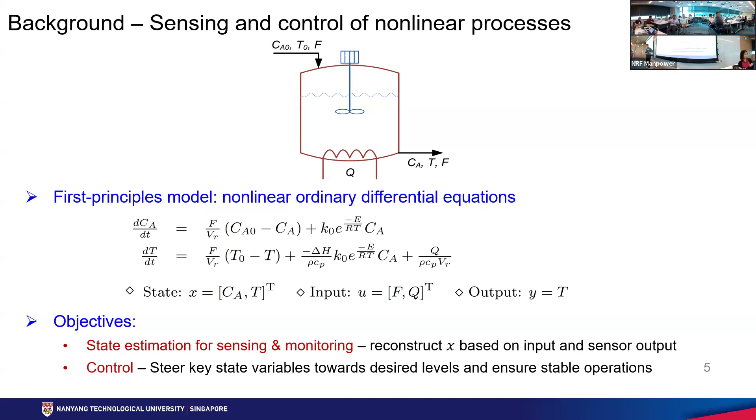This is state estimation and control, and from a practical point of view, we will integrate both components together. In terms of applications, process sensing and control are progressively adopted in many industries, almost all the application examples. Here, I would like to use some case studies we have been considering for illustration purposes.

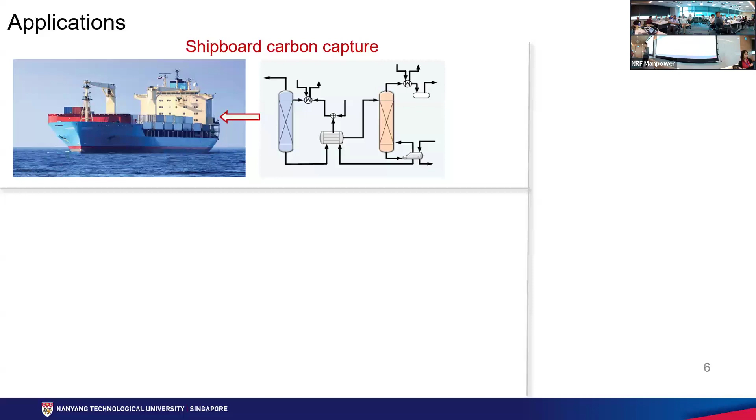So in one project, we consider the attachment of a carbon capture process to the ship in order to capture the carbon content in the emission of the ship engines. This is a more realistic realization of mitigating carbon emission from ships in the near future, say in the next 1 or 2 decades.

We also consider power-to-liquid plants to produce methanol in a very green way. We use an electrolyzer to produce hydrogen, and then we produce methanol. This mitigates carbon emission because some of the CO2 has been taken advantage of in the reactor to produce methanol. Another example is wastewater treatment plants, which involve both biological and chemical reactions.

Here, I use these three examples to highlight some of the challenges we are facing. In the previous slide, we can develop estimation, or sensing and control algorithms, for the reactors very well. You can even provide a theoretical guarantee. Without experiments, we can say with 90% confidence what will happen for the control and sensing scheme.

But for these large processes, honestly speaking, it has been challenging for us to develop applicable and scalable process sensing and control solutions. And this has motivated us to think about how we can revolutionize our research from both theoretical and applied points of view.

So here are some challenges we have faced as we deal with large-scale complex processes. First of all, it's about the complexity. Because of the complexity and the large scale, we have experienced very complex dynamical behaviors. Imagine if you would like to use physical knowledge to build a first principle model for the chemical reactor - we know the kinetics, and we can identify or use empirical knowledge to estimate some of the model parameters. It's not a problem.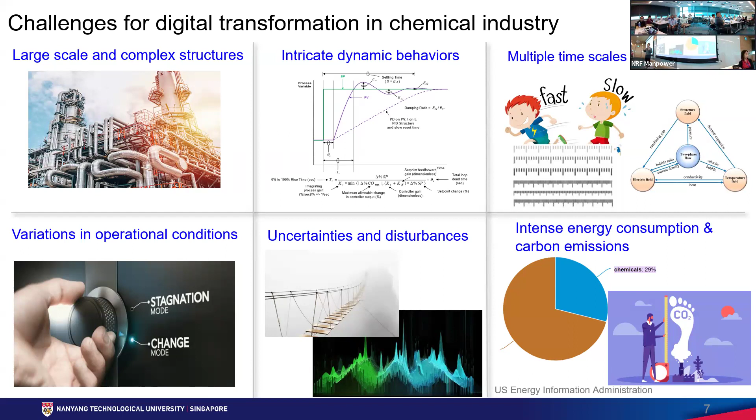And all these processes, no matter if it looks green or not, the fact is that they consume a lot of energy and they produce a lot of carbon emissions. And we'll need to think about how we develop the sensing and control schemes, how we build the models, and even at our upstream level, how we design the process properly to mitigate carbon emissions, to reduce energy consumption. Of course, before we achieve completely carbon neutral manufacturing.

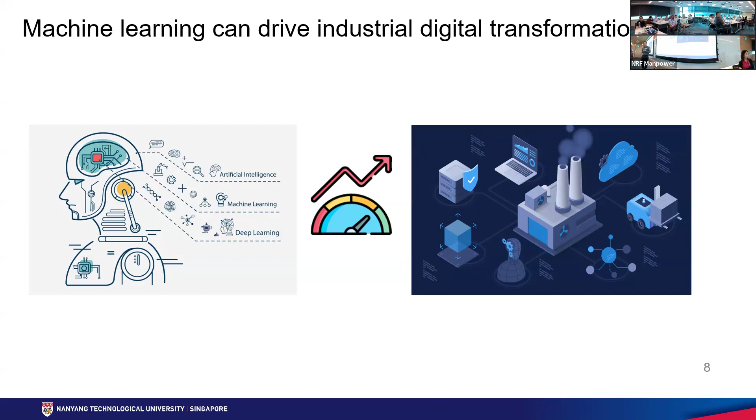So it has been widely accepted that machine learning will be able to drive industrial digital transformation. And machine learning will play an even more important role in this process. But as we have made some initial attempts in applying machine learning to address different problems in our research program, we have experienced some more challenges as we leverage machine learning, as we actively modify machine learning algorithms to address problems we are facing as process engineers.

So first is the data scarcity. We do have a lack of sufficient data, especially for academia. Companies may probably have some data on their own, but it will be difficult for them to share with us. Another associated problem is about the privacy. Privacy is another concern from industry partners. So safety, of course. When we apply machine learning, whether the model will perform robustly so that the safety will be ensured, that is one important concern.

Another concern is about the data privacy. They will share data through network communication, through cloud. So they have concerns about whether the data are properly protected. This is something we need to think about. For example, when we perform process sensing, when we perform process control, we need to consider data obfuscation or data encryption. That is fine from a data protection point of view. But some of the essential information will be hidden after data encryption. So this will stop us from implementing some of the advanced process control algorithms. So we'll need to rethink how machine learning can be used, how to leverage it appropriately to address these issues.

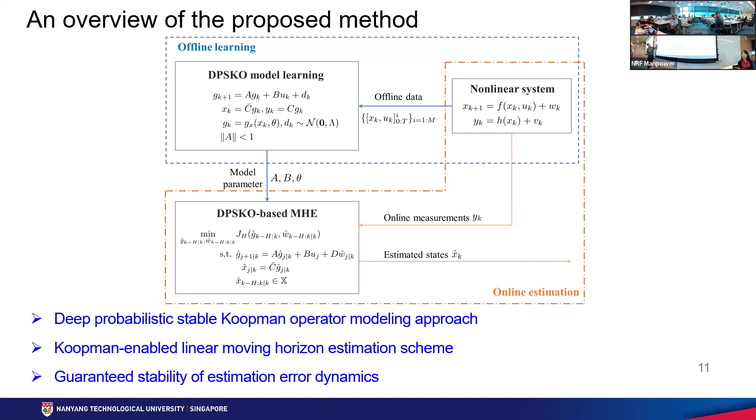And by leveraging machine learning and the Koopman modeling framework, we have developed a process sensing scheme. So this scheme can be used to estimate in real time the concentration of the materials, based on limited measurements of the temperatures, pressures, and flow rates. Okay. So here are some quick model training and process sensing results.

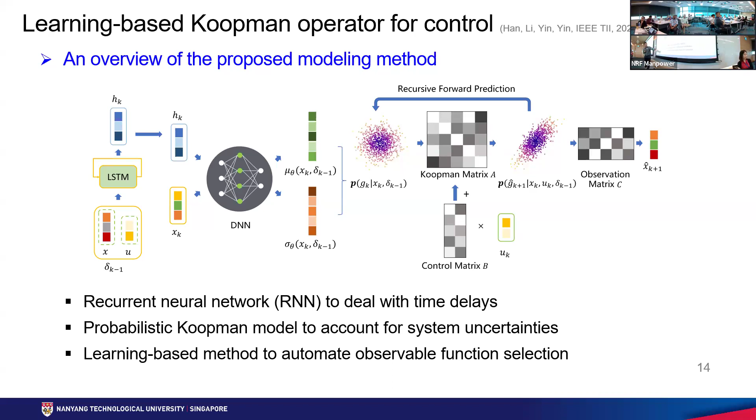And the Koopman framework together with deep learning have also been seamlessly integrated in our research for real-time optimal control. And we have leveraged recurrent neural networks to deal with another problem, which is the time delay, which is pervasive in the process industry. And we have built a probabilistic machine learning model to account for the system uncertainties and the time delay, and here are some quick control results.

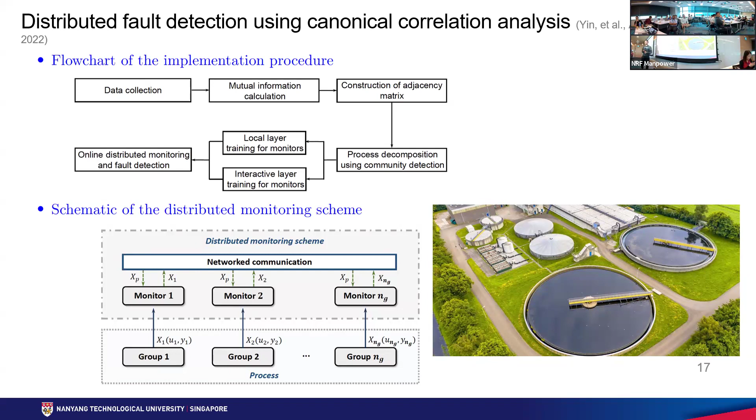We are also considering fault detection problems. We have been working on fault detection problems for years. And this is yet another machine learning algorithm. We leverage the so-called distributed framework, which means that we divide the big problem into smaller sub-problems. So probably when we leverage machine learning, we may also rethink the problem in this way. Can we build multiple machine learning agents instead of one when we deal with large-scale processes, or when we consider the scaling up of a certain solution? Okay, so here are some fault detection results.

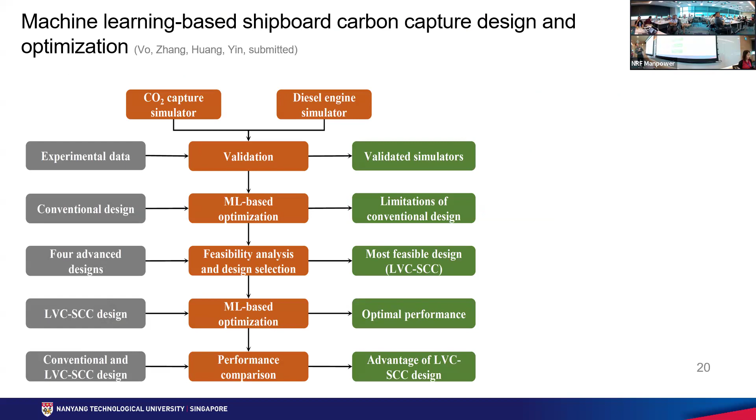And another topic we are considering is the use of machine learning to accelerate optimal process design and steady-state optimization. And this is the whole framework we have proposed in this paper. We have leveraged a deep neural network to characterize the relationship between inputs and outputs for some of the key components inside of this ship carbon capture process. We use machine learning to account for the diesel engine, the auxiliary engine on the ship, which produces additional power for the carbon capture process. We also have another deep learning model to account for the absorption column and the desorption column.

And we have performed some comparisons. So using machine learning can help us to reduce the energy consumption in steady-state operation by at least 10 to 15%. Okay, so here are some machine learning results.

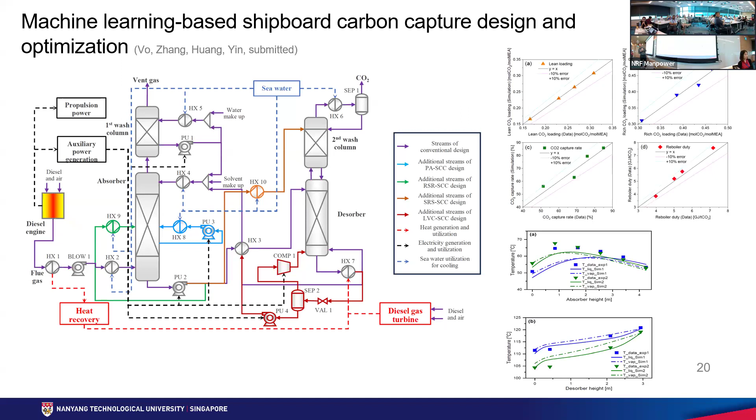I think we're beginning to appreciate the complexity of the problems we deal with in manufacturing and process systems, right? So with that, the last presentation is actually a tag team across A*STAR institutes. We'll start with Andrew, and we'll be talking about test bedding, scale up, and digitalization approaches towards process development. So Andrew, the time is yours.

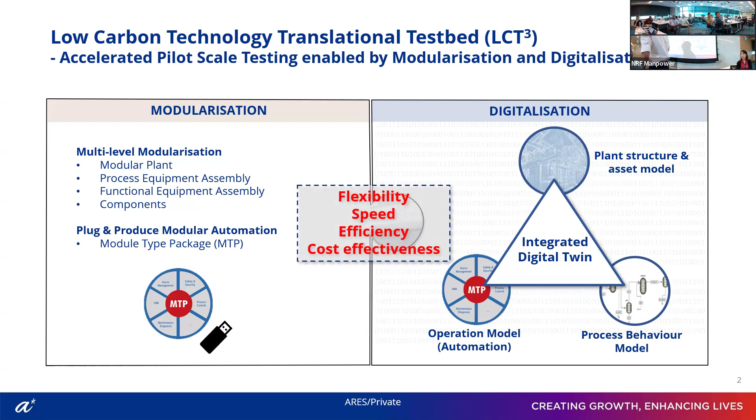for testing. And on the digitalization side, we have an integrated digital twin which supports and enables the modularization. Because modularization of a process plant is complex, we need digital tools to support us in managing the modular plant. So we have 3 key digital tools which are integrated to form an integrated digital twin: the process automation, which forms an operational model; the process behavior model, process simulation; and also the plant and asset model, which puts all the plant and facility data into a database so we can manage the entire facility as a whole. And this brings us flexibility, speed, efficiency, and cost effectiveness.

Okay, so through the use of our digital twin, we are able to support the entire life cycle of the process plant, from product development all the way up to production and maintenance, which has been, I think, the key focus of this entire series of talks. I think Valerio has also covered some portion of the process development point, and we are also focusing on the process development phase as a piloting facility.

So where we see AI being able to be deployed to further accelerate and to enable us to do the testing in a more systematic, organized and efficient manner, is helping us select and evaluate different process technologies, the most optimized ones which fit the new product that we want to test bed. So when the product comes in to the test bedding facility, we need to evaluate the most appropriate process technologies to fully enable the production of this chemical through the different steps, not only looking at the reaction technology, but also the separation technology.

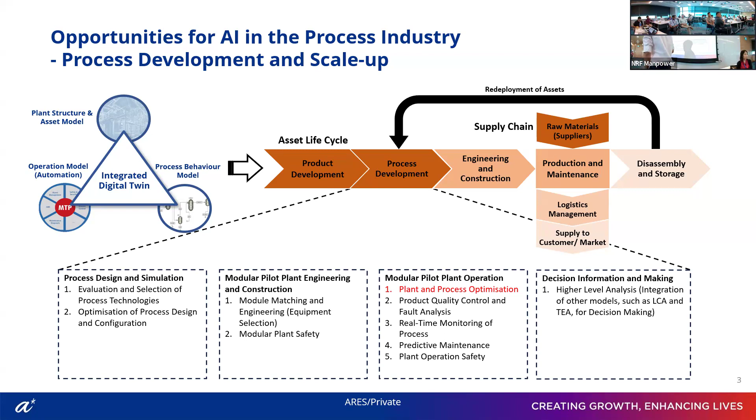Plant safety itself has been mentioned quite a bit, but bringing the modular aspect into the process plant increases the complexity. So we also see AI being able to help tackle this complexity with modular plant safety. And I think the hottest topic currently is commercial simulation vendors developing AI and ML tools specifically for plant and process optimization applications. And of course, as has also been mentioned, multi-factor analysis for decision-making purposes, such as LCA and TEA.

Okay, so what have we been working on? This is an example of what we have been trying to develop in terms of AI capabilities within the program itself. This is work done by IHPC, where they have developed a CFD first principle model, which is highly complex. What we are trying to do is use an AI surrogate model to integrate this complex model into a process level simulation. This enables us to use the highly complex CFD model through the surrogate model and tie it back into the entire process level simulation.

So then I will pass to Wei from I2R to continue to talk more in depth into this.

AI model. I2R is a partner to IHPC in this project. So the way we see it is that we have a very complicated, complex, and realistic CFD simulation model from our collaborator in IHPC. The challenge there is that it is very realistic, so it is also very compute intensive to run. So the way we see AI can help is to come up with an AI surrogate model for the simulation model.

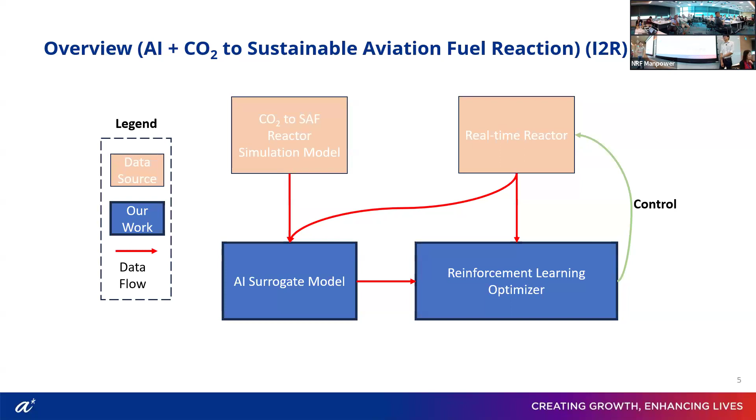So as you can see, AI comes in many ways. AI comes in as a way to accelerate the simulation. It also comes in as a way to blend all the different kinds of data together. And then it also serves as a way for us to control the reactor at different time scales and different spatial scales. So here I'll show you a very quick result of what we've been able to achieve.

So here we came up with an AI surrogate model based on deep neural network, because we expect in the next phase of the project to be receiving a lot of data from our collaborators, both from the experimental side and the simulation side. So being able to use neural network means we'll be able to use all these new compute resources coming out from chip companies that can run and train on very large data sets.

And so here we show some preliminary results for predicting the hydrocarbon concentration for the CO2 to sustainable aviation fuel reaction. So here you can see the prediction is actually doing very well as compared to the simulation result. And this is a model that is generalizable between different temperatures, pressure, velocity, and input reactant ratios.

So this is a very good result that I've been able to get with my team. On the reinforcement learning optimization side, we came up with a way to control the hydrocarbon concentration. This is based on the reinforcement learning framework, in which a policy approximator is learned from its interaction with an environment. In this case, the environment that we're using is the AI surrogate model, or even the very complex CFD model. The policy approximator will sample actions from it, giving an action from a policy distribution to be used to change the state.

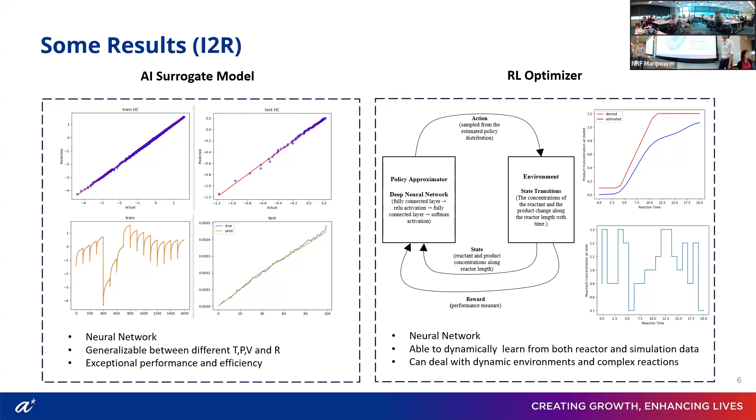Thank you, Wei, for that.

So we are looking at various different aspects of where AI and ML tools and technologies can be implemented throughout the entire process plant, not just at the equipment level.

Okay, so where we see this platform playing a role in AI development and bringing these AI technologies to industrial adoption is that since this facility or this program has been built from the ground up as a very data-driven, highly digitalized system.

It will be easier to integrate and be able to test different novel AI and ML technologies being developed for the process industry. And being a test-bed facility, there's no risk that it will affect a production plant. So being a test bedding facility, we have the advantage of being able to put in very novel and highly advanced technologies to be able to test them.

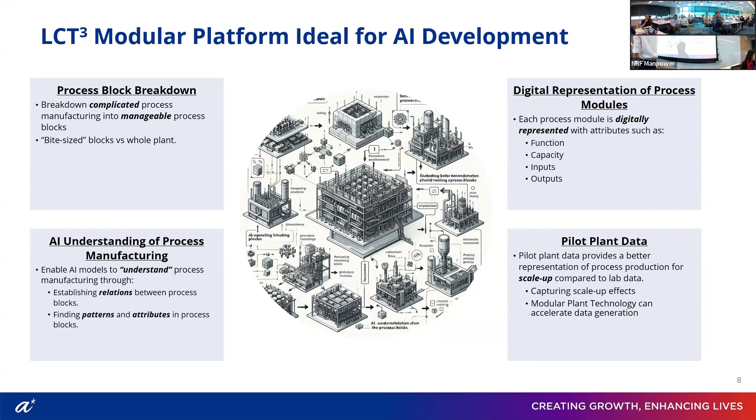Also on the point of being able to get reliable and relevant data for AI and ML training, this facility, being at the scale of a pilot plant, is able to generate data which is at a relevant scale. And being modular, we are able to more rapidly do many different test beds, accelerating the generation of data coming out from the facility. Thank you.